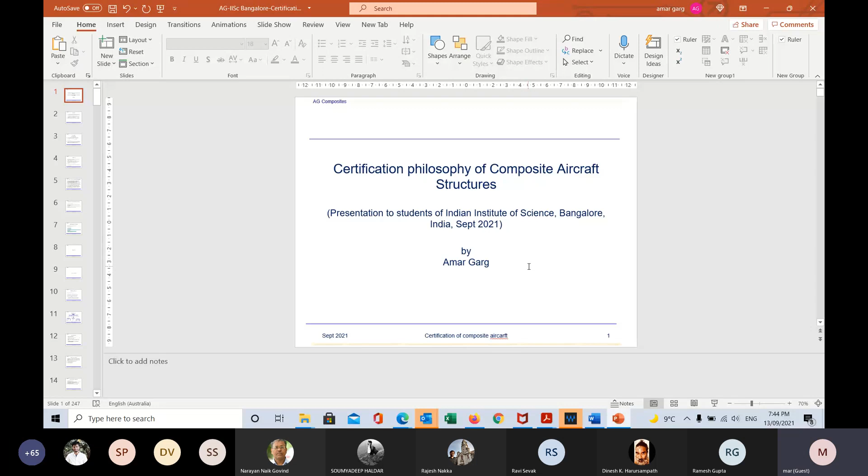As you know, the topic for this discussion is certification philosophy of composite aircraft structures. As Professor Dinesh has highlighted, my example comes from the movable trailing edge structures, but the certification philosophy, whether it's a movable trailing edge or the whole aircraft, is similar, the same. I worked on the movable trailing edge within this company when the 787 was just starting, right in the beginning, and that's the example which I chose. I had also presented a paper with my colleague at one of the SAMPE meetings, which I have taken material from.

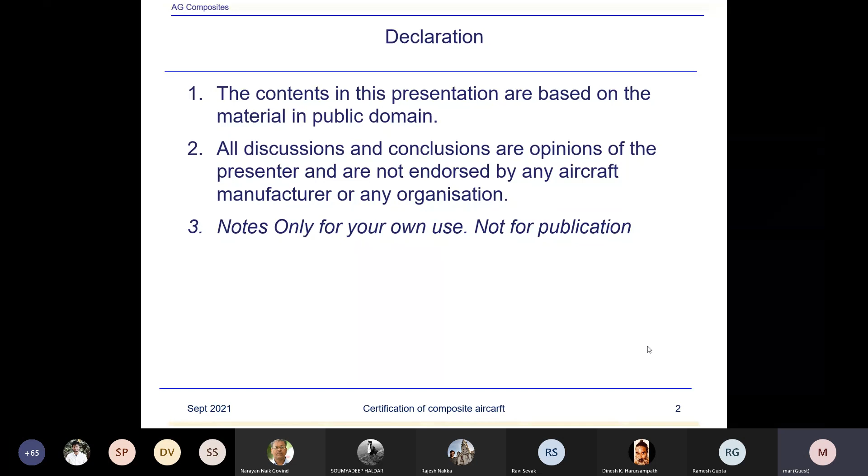I want to declare this because I've been an employee of Boeing, and we are bound by our non-disclosure agreement with Boeing, so I can't give any information that is confidential or not in public domain. All contents in this presentation are based on materials in the public domain. All discussions, conclusions, or opinions are of the presenter and not endorsed by any aircraft manufacturer or organization. It's only for your own use, not for publication.

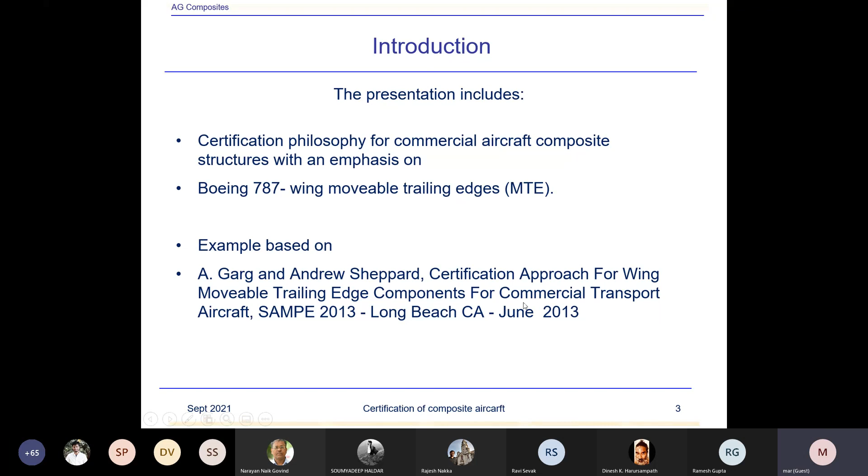Introduction: certification philosophy of commercial composite aircraft structures with an emphasis on 787 movable trailing edges. This is a paper type. I won't go through all of it, but certain references I thought are interesting to highlight.

The first is a paper from SAMPE. The second is again a paper from Boeing on the 777 empennage certification approach, which was presented at ICCM 11 by A. Fawcett and others. They are all retired from Boeing now. Fawcett was a great person in composite structures at Boeing.

The third paper, William, is also from Boeing company. By the way, you can all download this from the internet free. If you go to ICCM 11, it'll give you, it's freely available, all ICCM papers. This is also freely available. You can download the Mil Handbook 17.

I'm sure you might be familiar with Mil Handbook 17, now known as the Composite Material Handbook. But the catch is, if you want to buy the Composite Material Handbook, all the volumes cost almost $2,500, whereas Mil Handbook 17, the previous version of the Composite Material Handbook, is available free to download from the internet, and there's not much difference between it and the revised edition. So I would advise you, if you haven't got access to Mil Handbook 17, please download it. It's very important because all the information about composites—testing, design, certification, and data analysis—is contained in these volumes.

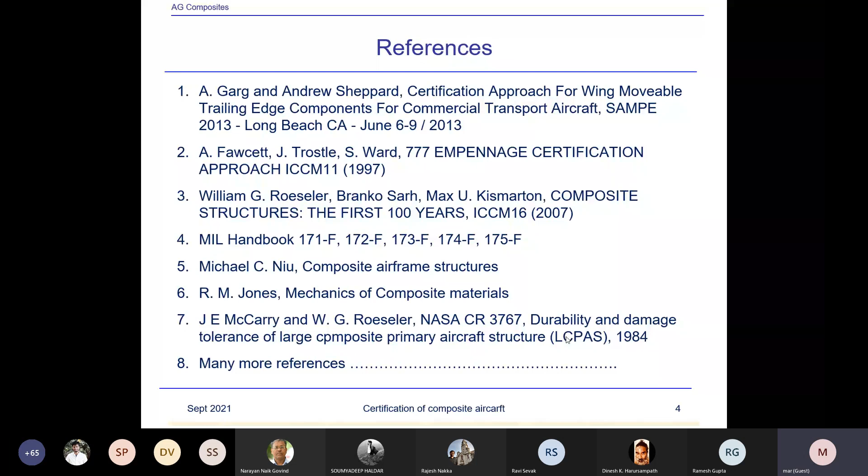Civil aircraft certification regulations are also important, and again everything can be downloaded from the internet. You may please go ahead. I muted the noise from one of the participants.

I think Dr. Garg is muted. Dr. Garg, can you unmute yourself, please? The noise was not from your end, it was from somebody else. Muted here. All right. Yeah, we can now see it.

So I was just highlighting these regulations. Part 23 is for small airplanes. Part 25 is for large commercial transport aircraft. Part 21 covers certification procedures for products and parts, and so on. Now, another important document here is Advisory Circular AC 20-107B.

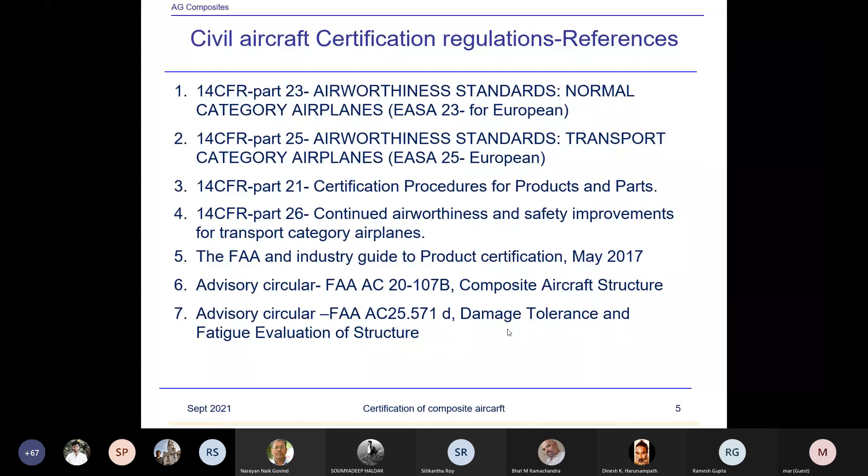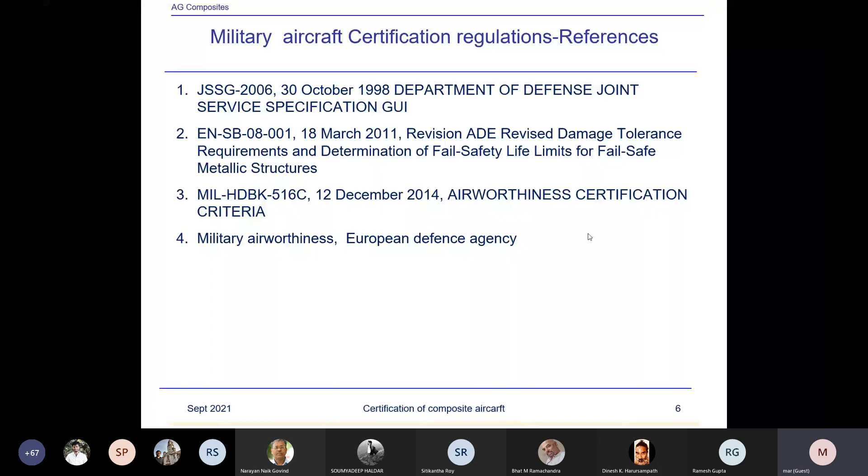This is also a very important document from the certification point of view for damage tolerance and fail-safe studies strategy - how do you meet those requirements. For military aircraft, JSSG 2006. Again, all these documents you can download. They are in public domain, freely available, useful documents. I'll put up certain links for the references, which you can use to download those documents.

Now let's consider what is certification. So certification of aircraft is a conformation to its approved design, confirmation of manufacturing processes, and is in a condition of safe operation. This is all coming from FAA documents, in fact.

So basically, the certification ensures the safety of the product. The role of a regulator is to certify a product which is safe. So they ensure the safety for the public.

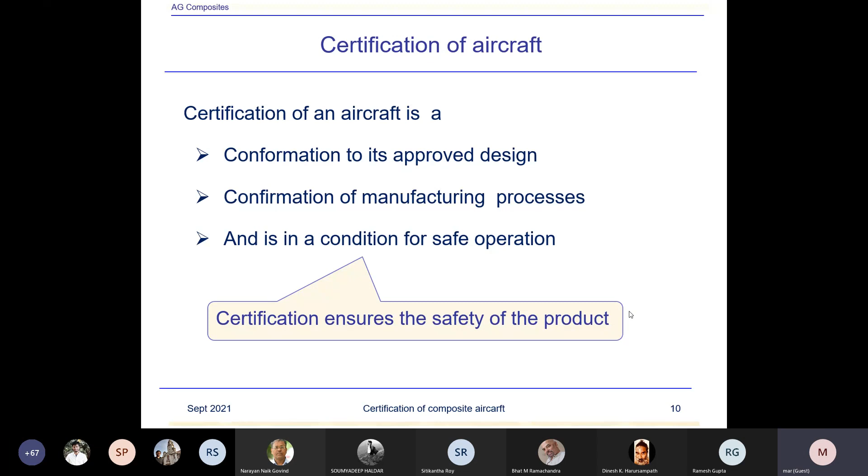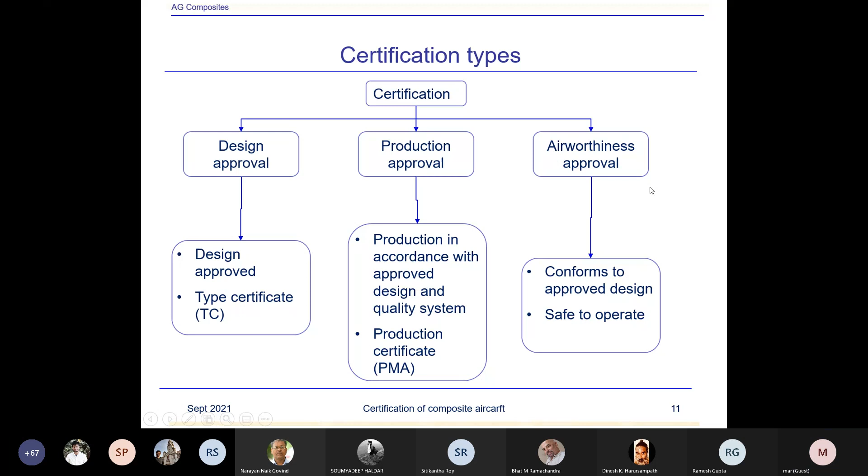Airworthiness approval conforms to approved design and is safe to operate. Now, TC, what is a TC? This is issued by the regulatory agency. TC signifies the airworthiness of approved design or type of an aircraft to be manufactured.

Now suppose Boeing had to launch the project, the 787, when it was launched. Naturally, it would submit the application for the project to FAA. And of course, in the next diagram, I will show you all the procedure rather than discussing now. And of course, after the design is approved, they will issue a type certificate.

Type certificate is the certificate for a particular design of the product or particular aircraft type. And once TC is issued, no changes can be made to the design of the aircraft, any part, unless you apply again to the regulatory agency to get an additional or supplemental type certificate.

TC once issued, design cannot be changed unless at least part of the certification process is repeated to cover the changes. TC reflects that the type design is in compliance with airworthiness requirements.

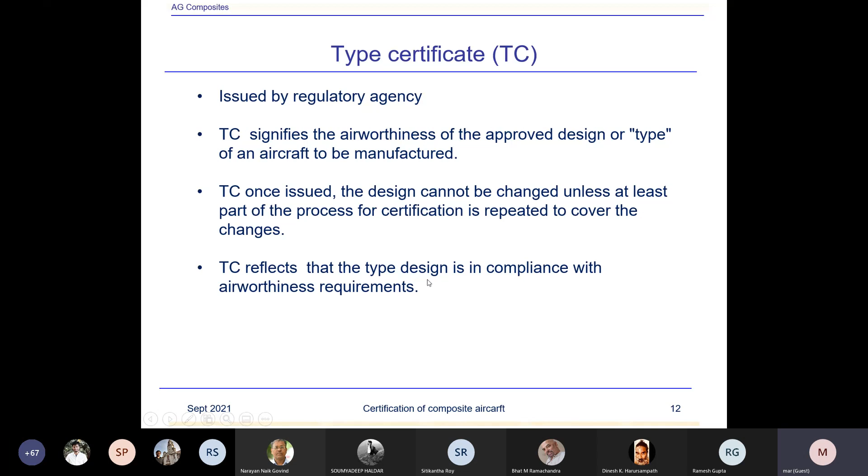Design approval means type certificate, TC, including amended and supplemental type certificate STC, or the approved design under product manufacturing approval, PMA, technical standard order authorization, letter of TSO design approval, or other approved design.

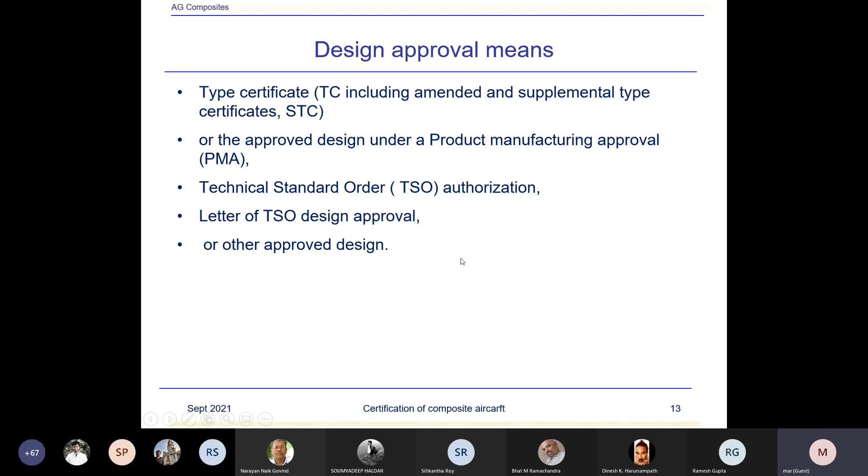Production approval means it is a document issued by FAA that allows the production of a product or article in accordance with its approved design and approved quality system, and can take the form of a production certificate, a product manufacturing approval, or technical standard authorization.

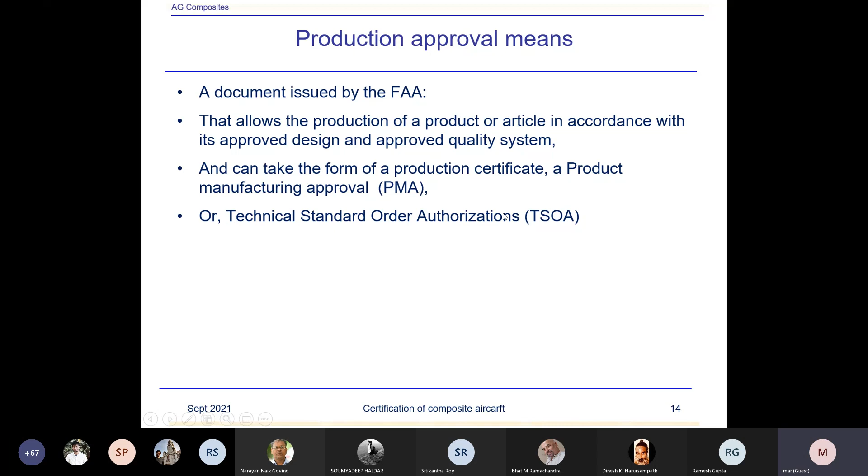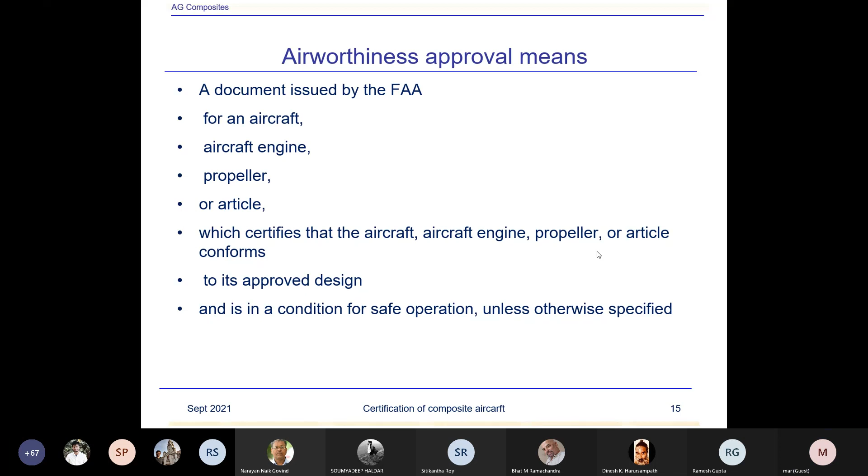Airworthiness approval is a document issued by FAA for an aircraft, engine, propeller, or article which certifies that it conforms to its approved design and is in a condition of safe operation. So that means for a product like aircraft, all three certificates are necessary before the company can sell the aircraft.

Type inspection authorization means TIA, which I'll show you next slide. TIA is used to authorize official conformity, airworthiness inspection, and flight test necessary to fulfill certain requirements for TC, STC, amended TC, and amended STC.

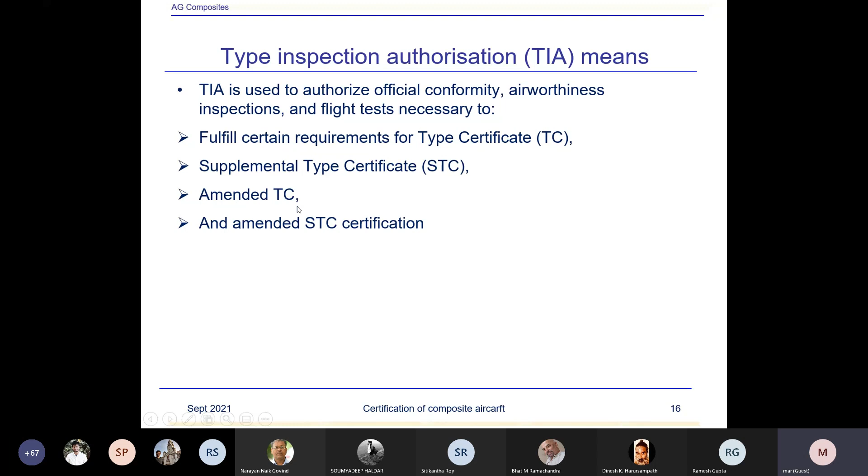Now, this is the flow chart which is important for the certification process. Manufacturer application for TC - say Boeing for 787 - applies for TC to FAA, with airplane certification, specification report, and certification plan, which is submitted. Then the regulator will assign a project number for that.

Once the project number is assigned, the manufacturer will start working on the design, fabrication methods, the material processes, and so on. Once the manufacturer has done its work, it will submit the data to the regulator, which reviews the design.

The manufacturer conducts structural, material and flight tests after that. Once the regulator is satisfied with the design, the process, and certain material and structural test data, the regulator issues the type inspection authorization, which I showed in the previous slide. That authorizes the manufacturer to perform the flight testing of the aircraft.

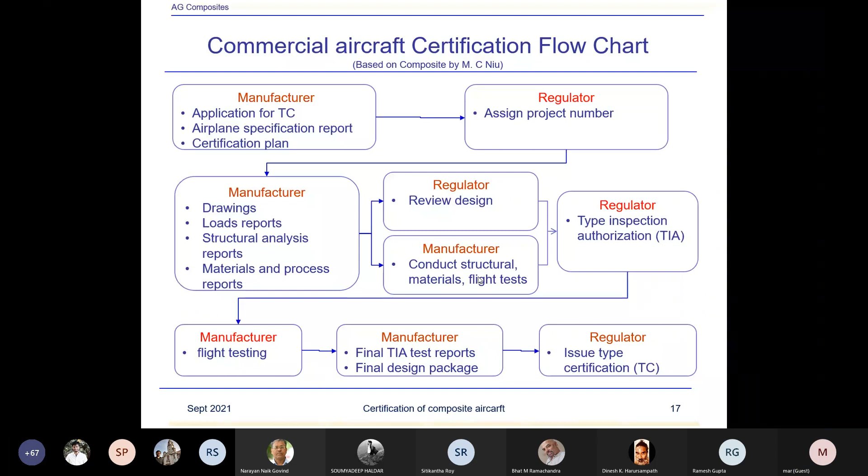Now, for military certification, I don't have a flow diagram like that because there's no single flow diagram. Certification of a military aircraft is generally a process negotiated between manufacturer and regulator. A flowchart for military aircraft would be different to civil aviation and isn't provided here because I don't have access to that and there's no single flowchart.

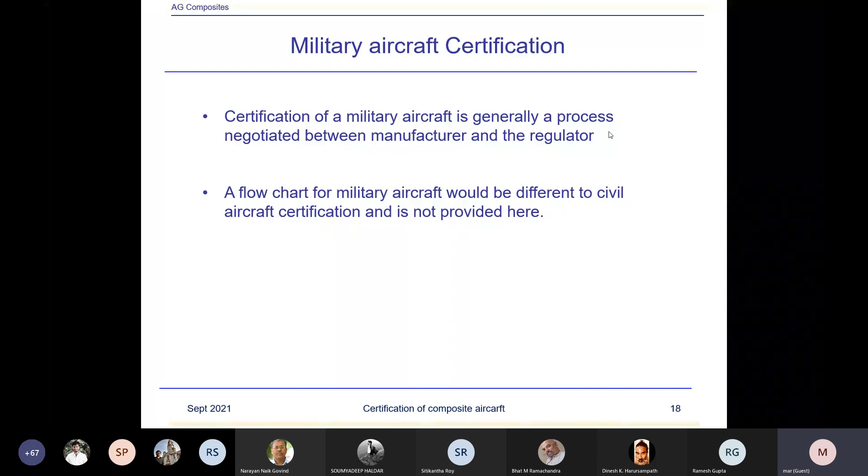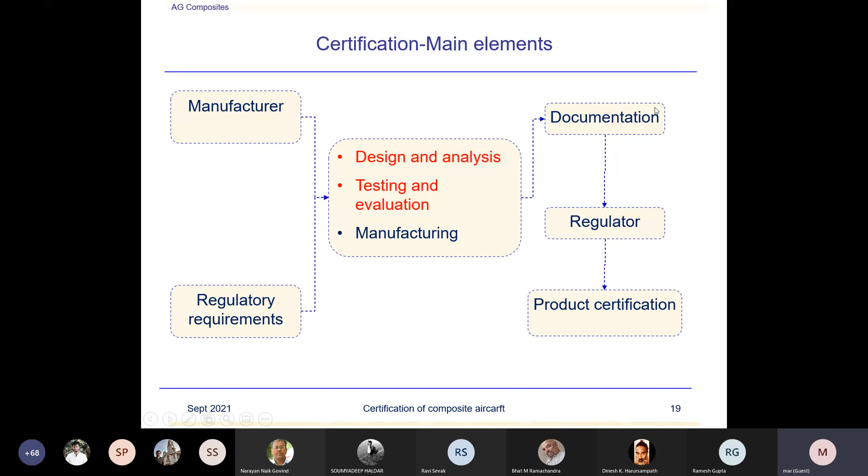Okay, main elements of the certification: you have manufacturer and regulator requirements, design analysis, testing and evaluation, and manufacturing. These are the three basic elements for certification. And then, of course, the documentation which is submitted to the regulator, and the product certificate. That's what we discussed in the previous slide.

Challenges for certification for composite compared to metals. The issue is, what is the difference between certification of a composite structure and metallic structures? We know there are certain differences between composite materials - they are heterogeneous, they are anisotropic, which puts certain difficulties in the analysis of the structures because of anisotropy. While metals are isotropic, the analysis becomes easier compared to anisotropic materials.

Environmental sensitivity - resins, we know, are highly environmentally sensitive. Suppose we're talking of the current composite materials used for most aircraft structures, which are cured at 350 degrees Fahrenheit or 180 degrees centigrade, the epoxies. They are sensitive to temperature and moisture. If we consider compression strength compared to room temperature at about 70 degrees centigrade, which is normally the operational temperature for which we design the aircraft, the degradation factor we normally get is almost 20% reduction in compressive strength. So that's environmentally sensitive with both moisture and temperature.

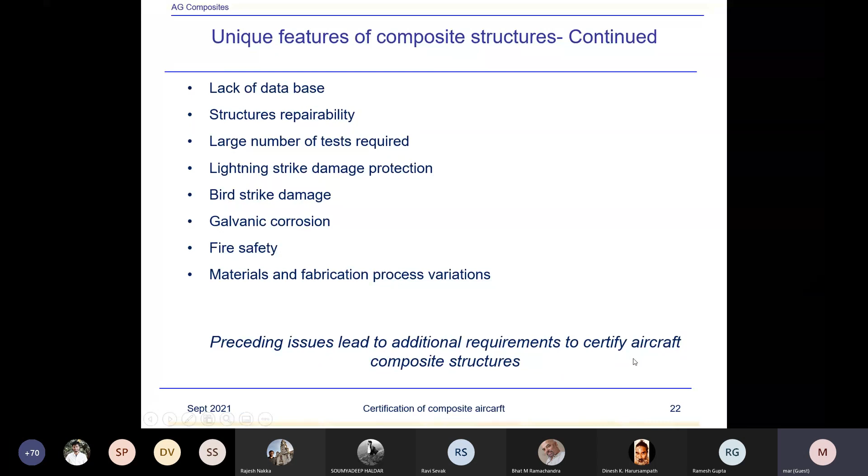Usage of composites in aircraft - one of the key drivers for the use of composites. Now, one would ask, I have shown many of the difficulties of using composite structures compared to metal. Then why do we use composites at all?

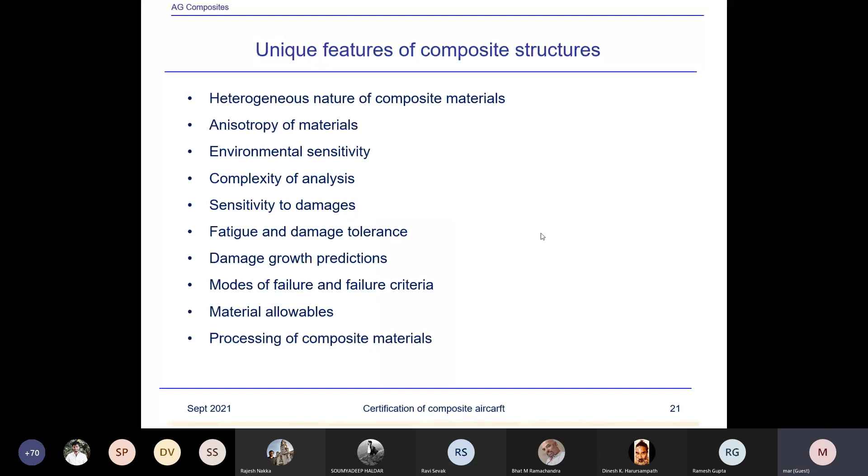The key is that composites do have advantages, and that is why today's aircraft like the 787 or Airbus 350 have almost 50% composites in the structure, because it leads to fuel consumption reduction. So key drivers of composite usage are weight reduction and fuel efficiency for aircraft, which leads to cost saving for the airlines, and it is also environmentally friendly. If you can reduce fuel consumption, naturally you create less greenhouse gases.

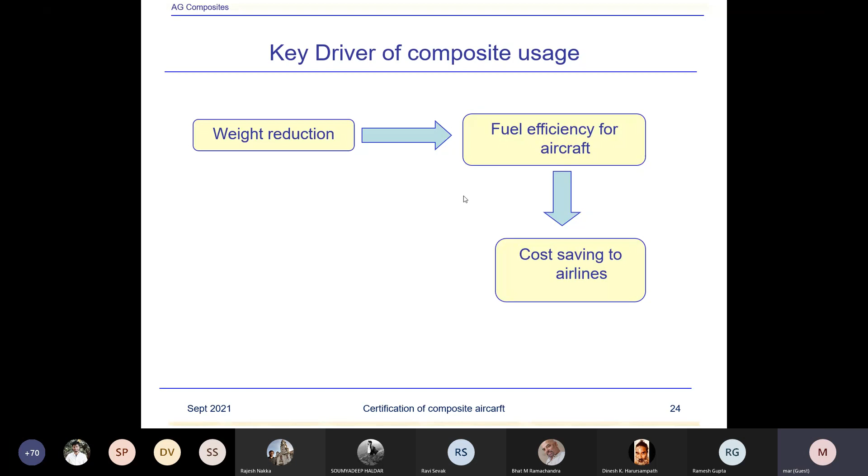Motivation of composite usage in aerospace: compared to aluminum, there is certain improvement in parameters - high specific strength and stiffness. Composites offer very high stiffness and strength with low density. Fatigue behavior is better than metal for composites. There are also minimized corrosion issues - aluminum corrodes while carbon doesn't, so naturally it's an advantage.

Reduced number of parts - you can integrate many of the parts and details possible, which may save cost, and also reduced number of fasteners. You can do bonding of the structures, which reduces the fasteners, and fasteners are a big cost to the aircraft industry.

Due to this, the result is lower weight, lower fuel consumption, lower maintenance, lower cost, increased cabin pressure, and increased passenger comfort.

Dr. Garg, can I ask a question here? Yes, sure. This is Amar Bhatt, I am from IISc, a colleague of Dr. Dinesh. In this slide, the last point is not very clear to me - how does using composites help increase cabin pressure?

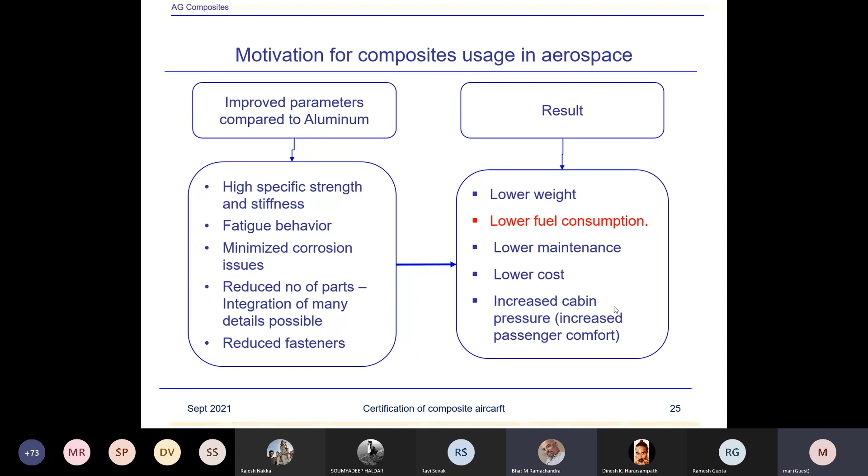Okay, now this is just an example to show the impact of the composite materials, and I have taken this information from one of the NASA reports, which again, these are Boeing people who had written quite some time back. So this is a Boeing analysis in public domain, on wing box and fuselage, when they were studying in 1980s, the composite structures, advantages compared to the aluminum.

NASA had funded lots of projects for Boeing, Lockheed, and you can go through the NASA technical reports server and download these reports, they're very interesting. Lots of commercial aircraft studies were done by these big companies through NASA, so that's why they are all in public domain.

I find NASA server to be very useful. Every day I search lots of reports from NASA and I get the information.

Very useful. Okay, now, so in this slide, what I have shown, just taking for example, that the wing box panels, composite wing box and fuselage savings compared to aluminum when they had done this study. This was done for a large commercial transport. Of course, this is in 1980s, and today we have much better materials compared to that time, and savings would be even more.

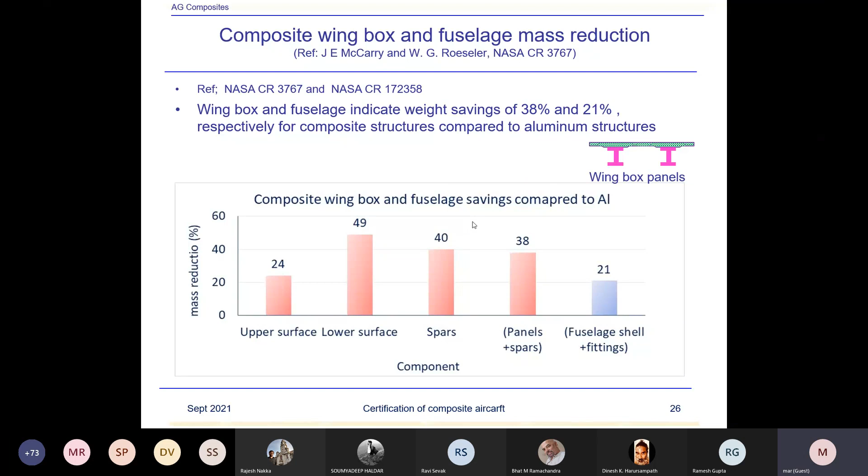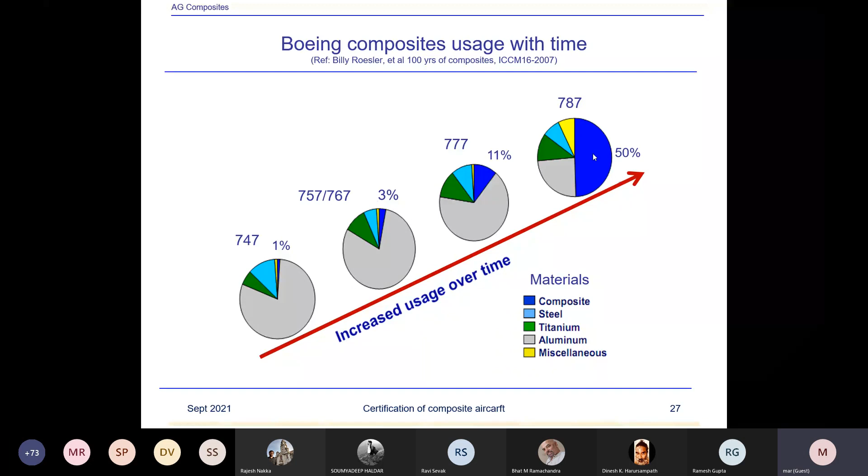And suddenly 787, certified in 2011, 50% composites. So there's a significant jump. Here you have the fuselage, wing, most of the structure is composites. Next slide will show that.

So this is the 787 aircraft, you can see, and almost all of the structure is carbon composite. And the equivalent aircraft from Airbus, the 350, is also similar to this, which is, by the way, 53% composite.

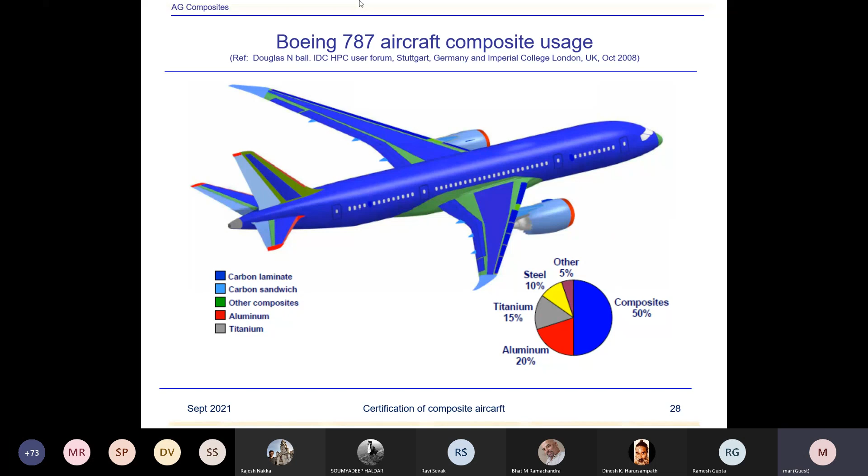This is a chart which I've taken from one of the publications, presentations by Boeing or in ICCM. What it is just showing you, say these are the aircraft like 747, oh sorry, this is 777, sorry, quads, 747, oh I'm sorry, 747 quads, 747, and these are like 777 aircraft, twins. But you see 787 lies over here in terms of fuel consumption per trip and fuel consumption per seat,

which is considered to be 20% fuel saving to the airline, which is a big saving in terms of cost to the airlines, and so, of course, then to passengers. Now, this has been possible by using the composites. It won't have been possible using a metal.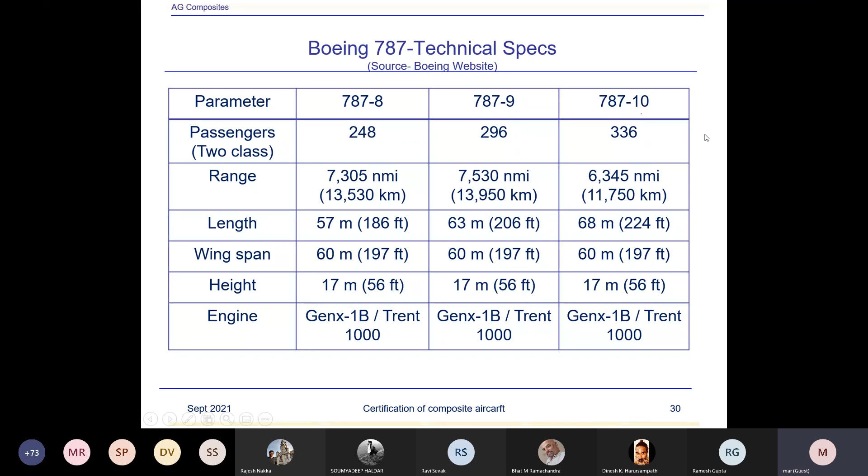Okay, now let's discuss the 787. Anybody has any questions so far? No. Okay, you can always ask me anytime.

Okay, 787 movable trailing edges. What are these movable trailing edges? Basically, they're the flaps, flaperon, and aileron, or trailing edge surfaces; they call them movable trailing edges. So you have inboard flap, you have flaperon between outboard flap and inboard flap, and then aileron. We all know the function of these details, and these are spoilers and the rigid hinge panel.

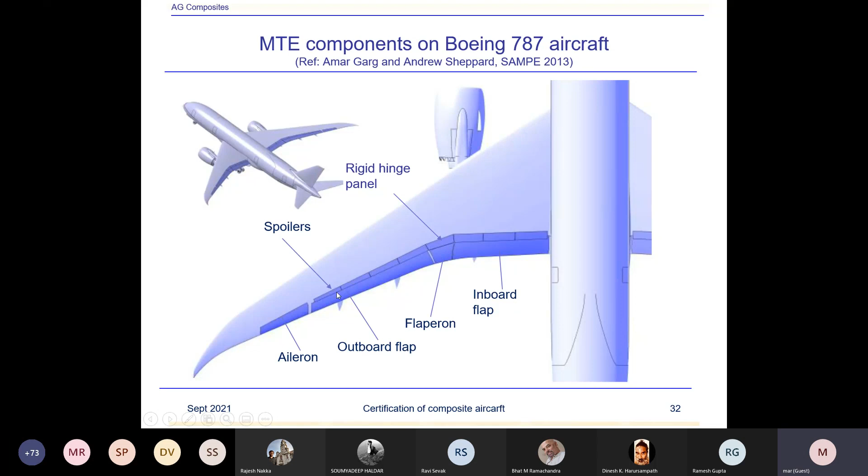Let me show you this one. So MTE structures, PSEs. What is PSE? Principal structural element. I'll show the next slide with the definition to make it very clear. So it's like a primary or secondary structure. This is secondary structure and this is primary structure. But rather than calling them secondary and primary, we call them principal structural elements and non-principal structural elements. These are principal structural elements: inboard flap, outboard flap, and aileron, which are fastened rib, skin, spar structures. They're like black aluminum basically when we designed them.

To manufacture these composite parts, the resin infusion process is used rather than the autoclave process. Non-PSEs are flaperon and spoilers. Flaperon is a stiffened structure, while spoilers are bonded sandwich structures, and they are autoclave cured, not resin infused parts.

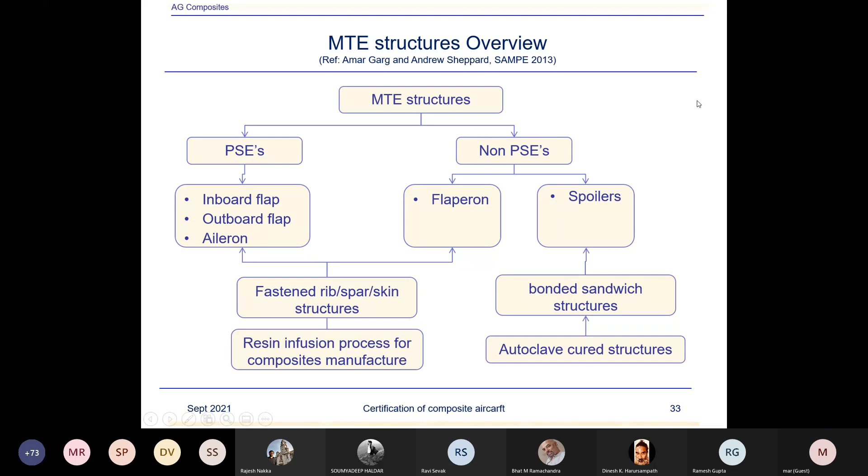Any question on this? No. Okay, so what is principal structural element, which is like a primary structure? Definition per AC 25.571D: an element that contributes significantly to the carrying of flight, ground, or pressurization loads, and whose integrity is essential in maintaining the overall integrity of the airplane structure. Basically, suppose a PSE fails, that means safety of the aircraft is jeopardized. That is why you do not want a PSE to fail.

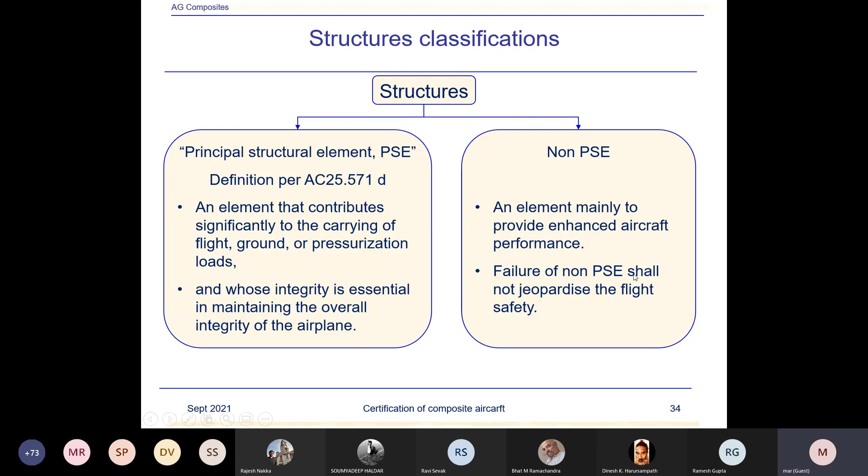Non-PSE are secondary structures essentially, an element mainly to provide enhanced aircraft performance. However, the failure of a non-PSE shall not jeopardize flight safety, whereas failure of a PSE will jeopardize flight safety. Failure of a non-PSE is about enhancing performance of the aircraft. That's the difference between these two.

Let's consider these individual components to highlight a bit more detail. I couldn't show the internal details here, but basically it has ribs, spars, like a conventional aluminum structure, and fastened. Inboard flap is a single slotted, single segment type high lift device. The structure consists of multiple spars and ribs fastened to the skin. Skin, rib, leading edge and spars are solid laminate.

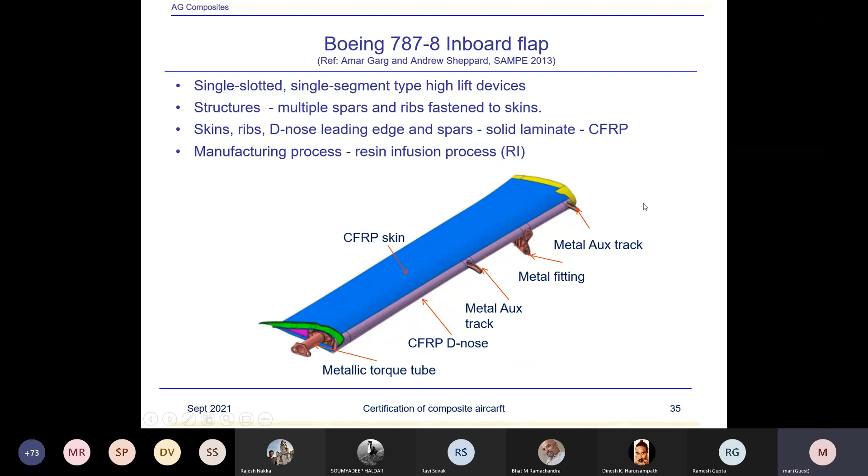Carbon fiber reinforced plastics, manufacturing process is resin infusion, and these are metal fittings, torque tube. Similarly, the outboard flap has exactly the same type of structure as the inboard flap: skin, composite, metal fitting, carbon D-nose, metal fitting, aux track.

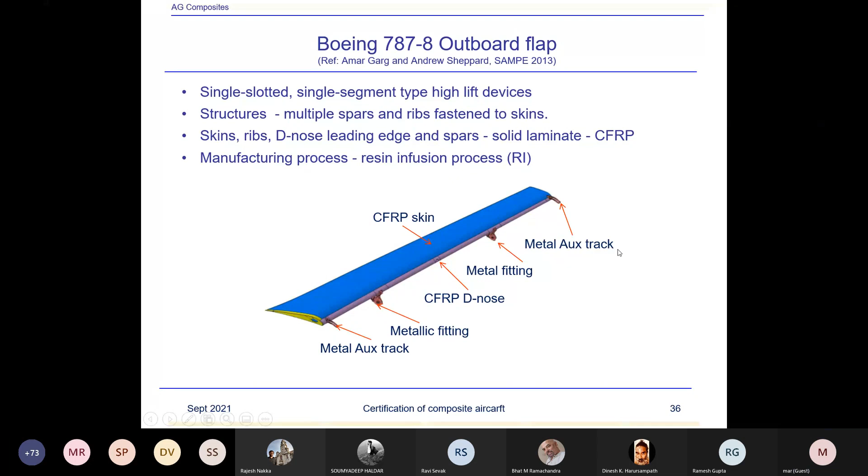Aileron is similar, it has multiple hinges. There's no D-nose here, and these are fittings and actuators both. Aileron hinge control surface is used for low speed roll control, lift control during takeoff, and drag reduction at high speeds.

Front and rear spars and ribs are fastened to the skins - skin, spars, and ribs are all solid laminates, similar to the flaps, with manufacturing process similar to the flaps, resin infusion process. I'll show those of you who are not familiar with the resin infusion process my discussion in some of the slides in this presentation.

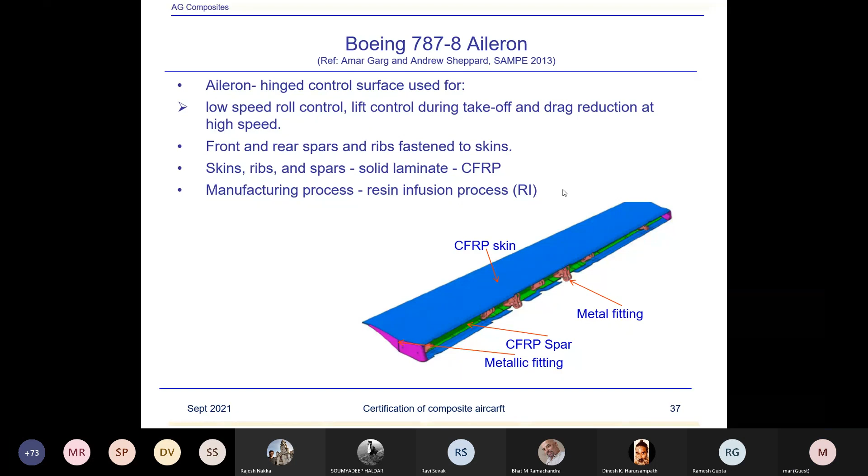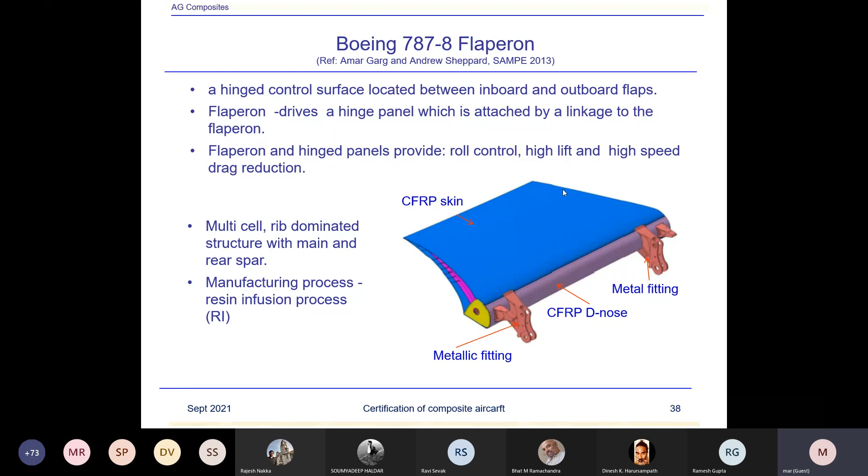Flaperon, similar to the flaps in terms of structure, is a hinge control surface between inboard and outboard flaps. Flaperon drives a hinge panel which is attached by linkage to the flaperon, and flaperon hinge panels provide roll control, high lift, and high speed drag reduction. Structure is similar, a multi-cell rib dominated structure with main and rear spars, manufacturing process resin infusion.

Spoilers, total 7 spoilers on either side. Spoilers function as speed brakes and for roll control, and also droop down to control the gap between the spoilers and the flap for high lift performance. So spoilers are full depth honeycomb core sandwiched between front CFRP spar and CFRP skin. So you have this carbon spar, carbon skins, and it's a honeycomb sandwich structure.

Now, the process to manufacture this is autoclave. One would ask, why not resin infusion? Of course, you can't use resin infusion process for sandwich structure. The reason being, if you try to use resin infusion for a sandwich structure, the core cells will get filled with resin. And so that's why you have to use the autoclave process.

Now I want to highlight sandwich structure. When I was working on the Airbus landing gear doors, I was in charge of a project developing the resin transfer molding process for the Airbus landing gear doors, because we were manufacturing in the early 90s. The Airbus landing gear doors for the 330 and 340 were being made by a Melbourne company, Boeing. At that time the landing gear structures were all sandwich, and we had to work on developing the structures using the resin transfer molding process.

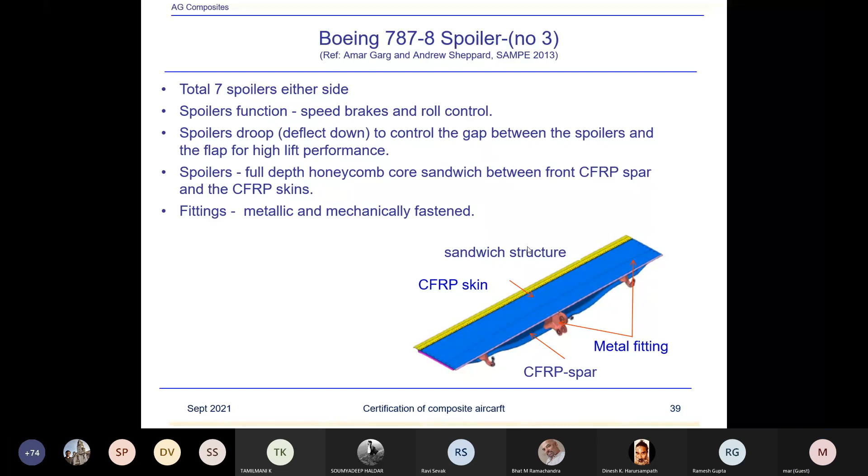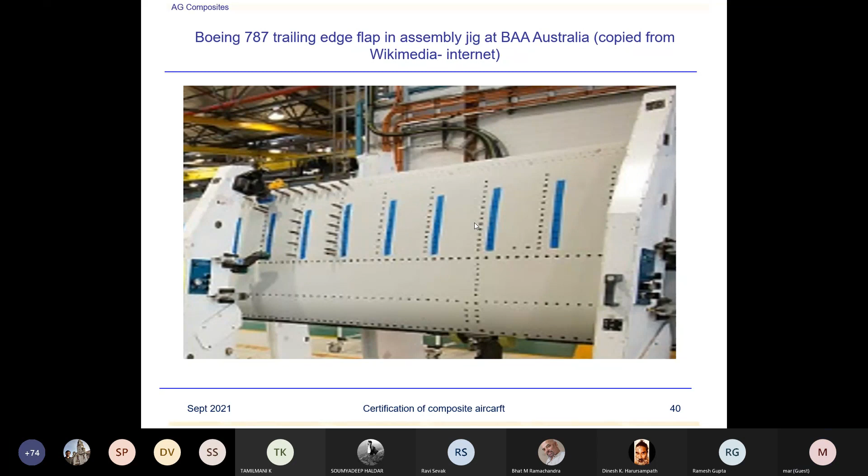So this is just a typical structure from outside. What you can see is it's like black aluminum, conventional aluminum structure, with rib, spars, stiffeners, all fastened together. Just a typical stiffened structure, I'll show you here, nothing great about it. Schematically, you have spars, D-nose connected, and the trailing edge.

Approach to certification. Okay, excuse me sir, sure, yes sir, I would like to ask about this aileron and these principal structural elements. You said that resin infusion is used, so in resin infusion, was the process like resin transfer molding only, or is it other variants?

Well, a resin infusion process is similar to what you are using, basically they are calling it a variety. Same process, different names. Some people call it resin infusion, Boeing calls it Capri. That was full pressure, but it's VARTM. So not with high pressure of resin, but by inducing vacuum. That's right, resin infusion process is that, because when I was telling the story about the landing gear door development using resin transfer molding, we were using a closed mold system at that time rather than vacuum. So that was resin transfer molding with a closed mold system, solid mold. So this process is nothing but VARTM, vacuum assisted resin transfer molding. Otherwise, a closed mold system is very expensive, and then it becomes not feasible. Yes sir, right, right, thank you, okay.

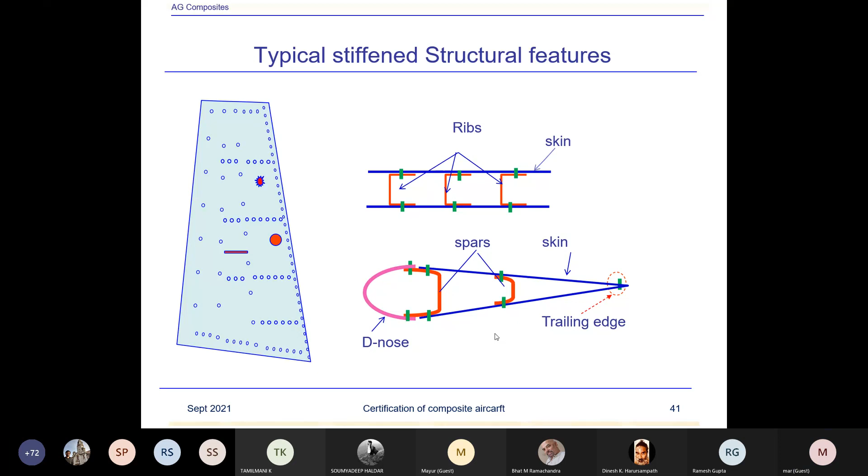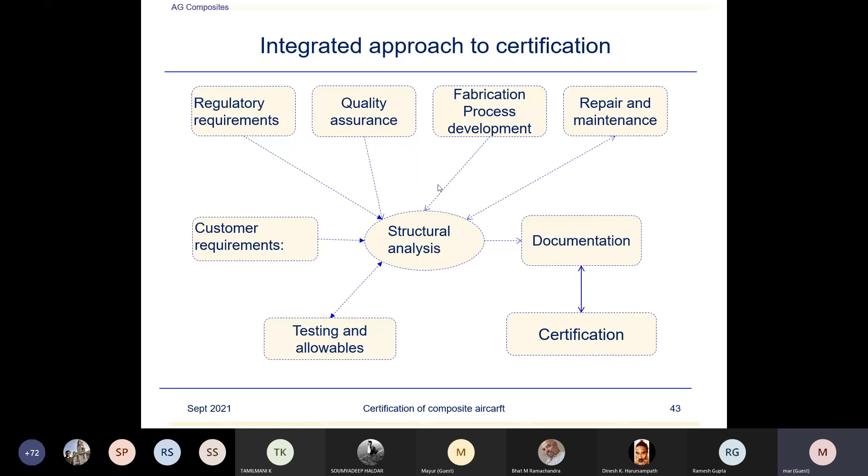Okay, now approach to certification. Certification approach is an integrated approach. I've not highlighted all the details over here, and there are many other considerations which go into the flow diagrams. I just put a few key elements for this. So you have the customer requirements, and you try to do the structural analysis, like suppose flaps you are designing, and using the customer requirements and the regulatory requirements, you would start working on design details. In order to do the design, of course, you would require testing and allowables, quality assurance, interaction, fabrication, process development, interaction with repair, maintenance, documentations. These are some of the elements important for structural analysis, but nevertheless it's not the end of it, there are plenty more. It's a very simplistic diagram I put. Customer requirements like performance, operational loads, weight, geometry, cost. These are performance requirements which you need to consider in order to develop your design.

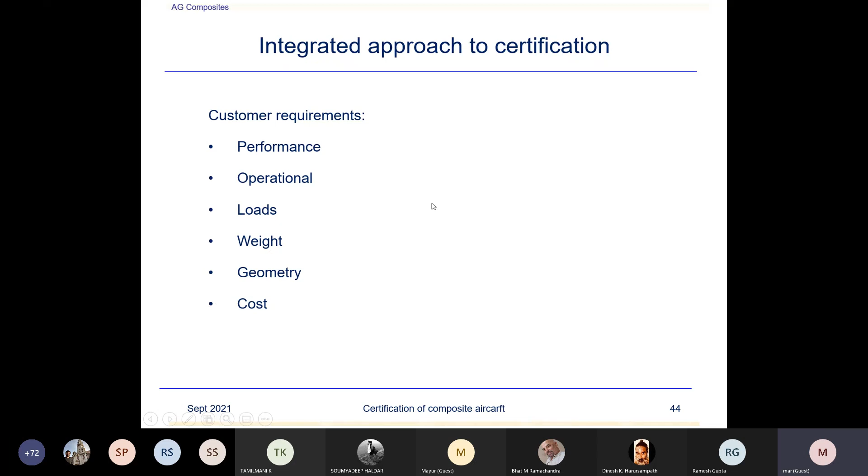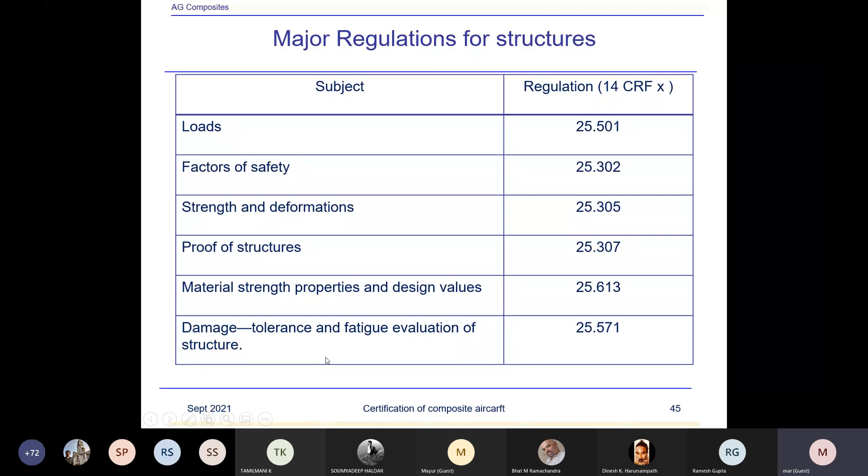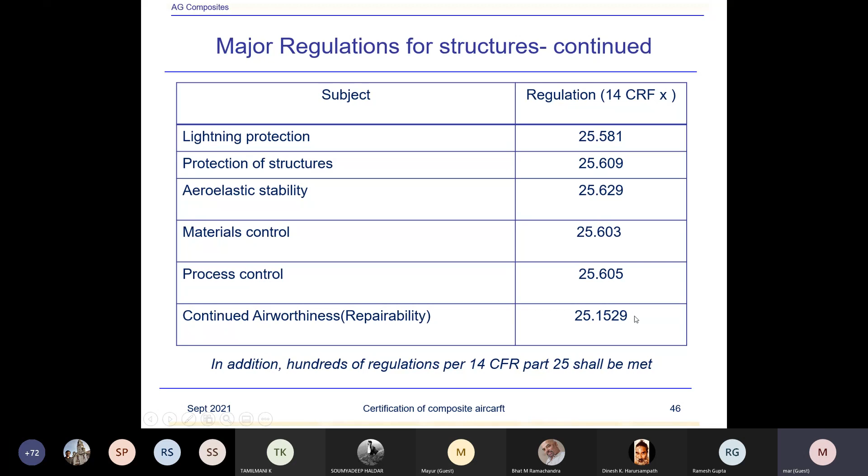I thought let me just put a table over here to highlight some of the important regulations for structures design, which are key to structural analysis and design. Like loads, you have 25.501, factor of safety 25.302, strength and deformation 305, 307 proof of structures, material properties 613, damage tolerance - this is very important, part 25.571 - and my main emphasis in this lecture would be 25.571, and you will hear me naming this quite repeatedly because it's one of the most important regulations to which we have to design aircraft structures. Lightning protection 25.581, protection of structure 609, stability aeroelasticity 629, materials control 603, process control 605, and continued airworthiness repairability 1529. In addition, hundreds of regulations per 14 CFR Part 25 shall be met in order to certify the product.

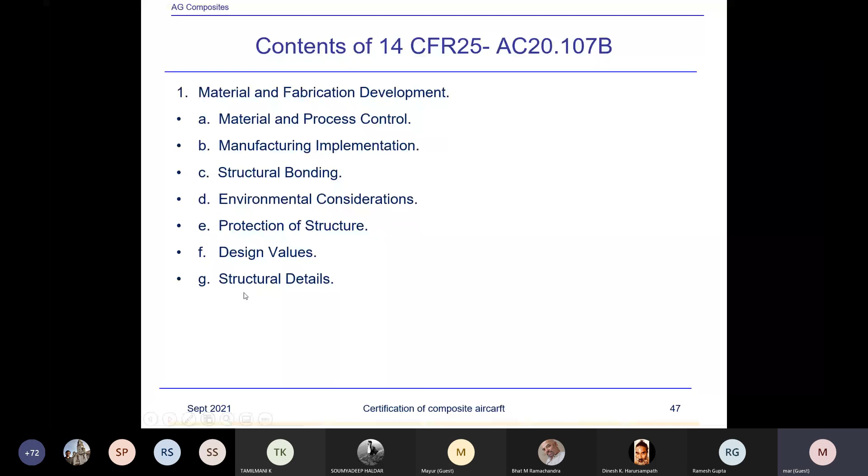I just put some details using 14 CFR 25, AC 20-107B, which is the guidance for aircraft composite structures, and what it contains. It contains materials and fabrication development, material process control, manufacturing implementation, structural bonding, environmental considerations, protection of structure, design values, structural details, proof of structure. How do you do the structural proof?

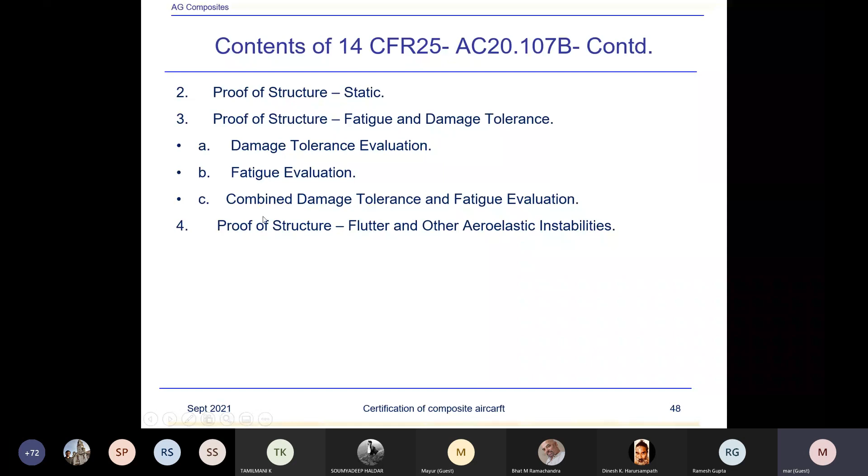Static and fatigue damage tolerance - it provides the methods: damage tolerance evaluation, fatigue evaluation, combined damage tolerance and fatigue evaluation, proof of structure, flutter and other aeroelastic instabilities, continued airworthiness, design for maintenance, maintenance practices, damage detection, inspection, repair, documentation, reporting, substantiation of repairs. There are also additional considerations like crashworthiness, fire protection, lightning protection, and so on.

I want to highlight, as I advised you, that you should download this document from the FAA website and just glance through it - you'll get a good feel for what it contains.

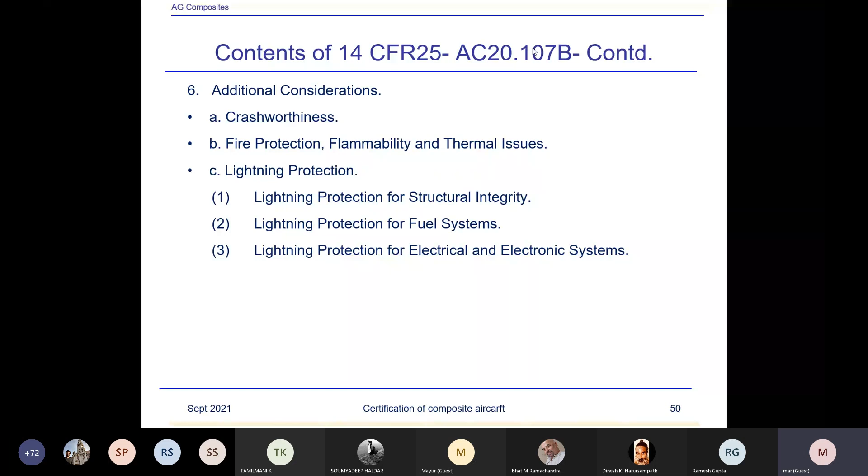Now, design certification approaches - certification of aircraft structure approaches. There are three types of approaches one could follow. One is certification by test, which is a point design approach, where it may initially be low cost, but in the long run this costs much more. So generally the industry will not use this approach, unless the industry has to produce only one part, one component, one product, and they are not looking into any variation of that later on. But generally, the industry will use certification by structural analysis verified by test.

Certification by analysis alone is also not recommended or easily acceptable. It may be accepted only if enough confidence in the analysis exists - you've developed the methods of analysis, and once FAA has approved all those methods, it might be easier to go through certification by analysis. But beyond this, suppose you've got all the methods and processes based on your previous versions of the aircraft - like Boeing, they have a lot of data available from previous metallic aircraft, and they could always piggyback because they've got design handbooks and can design the aircraft without performing significant amounts of tests.

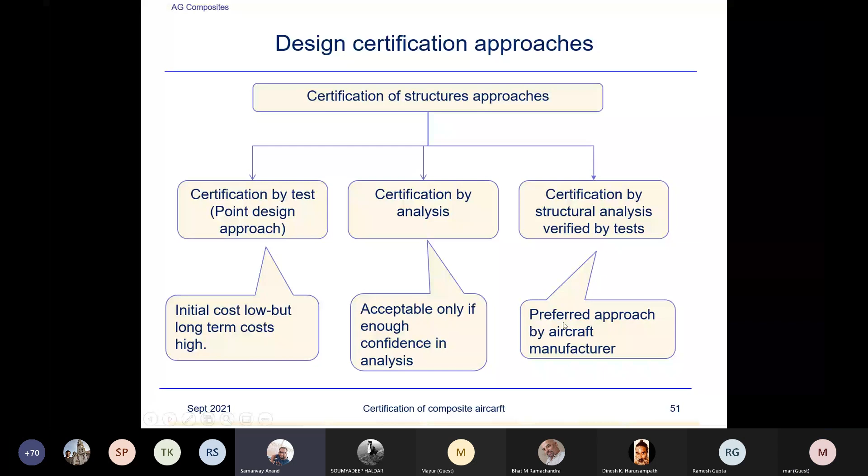So that's the reason. Okay, certification by testing the complete full structure. So allowables in this case is limited allowables. Initial cost may be lower. Any change in design will require testing the component again. And this is the problem with this approach.

Say the 787 aircraft, when it was designed, later on companies will always try to improve the design, change this part, another part, but it doesn't mean the company has to retest all of the aircraft.

Suppose they are changing one outboard flap which is designed as stiffened structure, and now the company decides they want to go for bonding technology, and they've got enough confidence in the bonding technology. They don't have to then test the whole aircraft.

What they can demonstrate, because they've got enough data for those materials, they may have to do only a limited amount of testing. So that's the advantage of that in the long run.

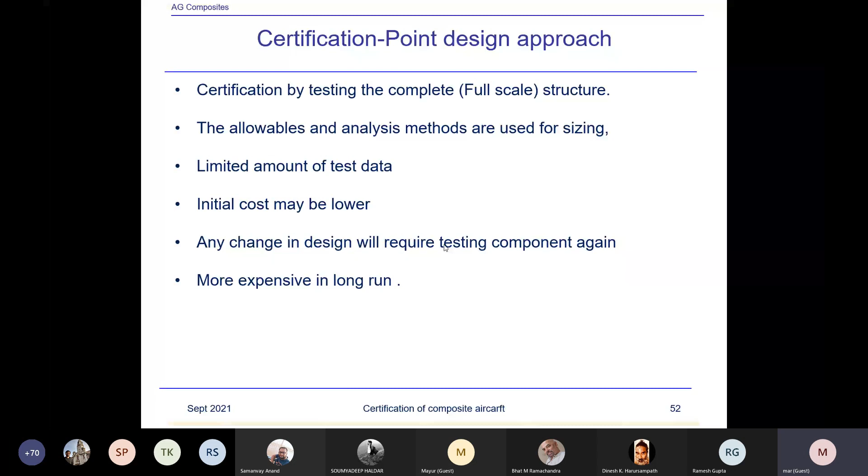Okay, certification by analysis verified by test. This is the preferred approach, as I said. So here you have an analysis certification of structures. Testing, you do coupon, element, subcomponent, component, using a building block approach to testing.

And this is what we'll discuss: what is the building block approach? Using this, you develop allowables and analysis methods verification. Essentially, what you are doing in this method, you are still certifying by the analysis, but all that analysis has been substantiated by your test data.

Same during the 787 program, and we'll discuss all the details when we are designing this component, flaps, all the movable trailing edges. The process was new at that time, the materials were new, and so we had to develop the analysis tools and verify them by testing.

Okay, now, so I said about the full scale testing requirement. This is what I've just written, the para from 25.571(b), which says damage tolerance evaluation. This demonstration must be by full scale fatigue test evidence. Of course, there are many paragraphs over here. So this is a must now.

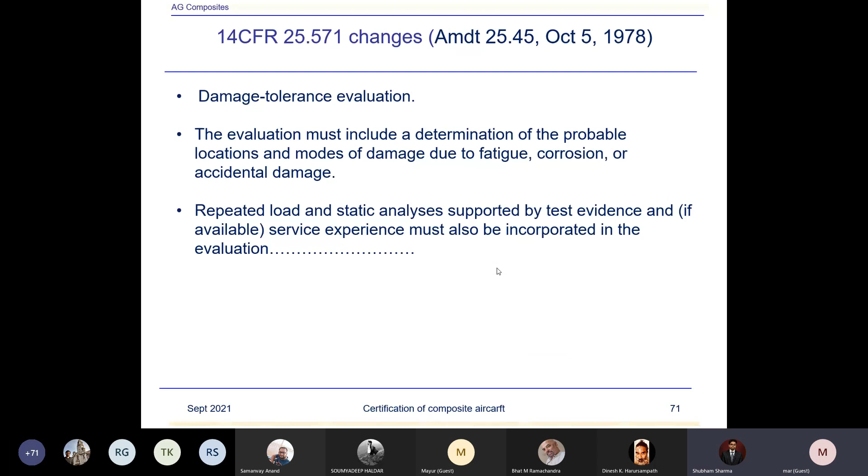And this requirement came after, in fact, I've got it, let me just show when this came. After the Aloha aircraft failure, and we'll discuss this issuance of Amendment 96 for WFD, widespread fatigue damage. And this is what happened.

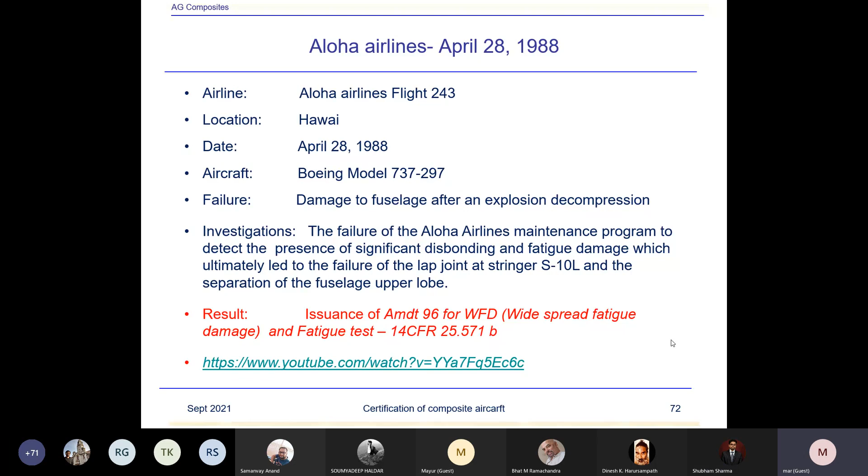So it's mandatory now for the whole aircraft to be tested before certification, full certification.

One more quick question. Sure. When you say each aircraft is subjected to full scale fatigue, do we mean to say one from a batch of 787, one sample full aircraft, or each manufactured one? No, not each manufactured. How can we test the whole fleet? That's what I was wondering.

No, it's one. This clause clearly says what happens. All this testing is done only for the first, initial production aircraft. Only one aircraft, say like the 787-8, the first aircraft, or maybe a series of 3 or 4 aircraft they will make.

One will be the flight test, or two will be the flight test. One will be this fatigue test. Another will be static test, like that.

Yes, okay. Once that is approved, then no, because what you are doing, you are having the same material, same production process, everything to be the same. You don't have to test everything. You can't test everything, every aircraft, no way.

And so in case there is a small change, then perhaps we have to do that. Well, now the thing is, then what happens? Suppose you're changing only a small part of the aircraft, then you will try to demonstrate that locally by subcomponent testing. You don't have to change again and test the whole of the aircraft.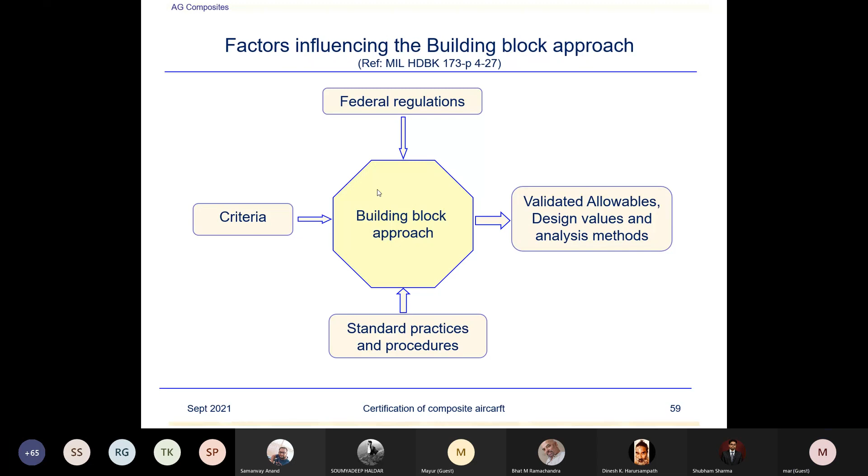Do we want to stop over here, just 5 minutes remaining before we close off? Any questions or comments you'd like to offer to make improvements for the next lecture?

Can I ask one of the questions? When we talk about certification, we saw your presentations that there is certification of process, certification of manufacturing, and all that. How about the raw material used for these fabrication processes? For example, carbon fiber itself or the epoxy itself? Are there mandatory certifications, or do we accept the manufacturer's certificate?

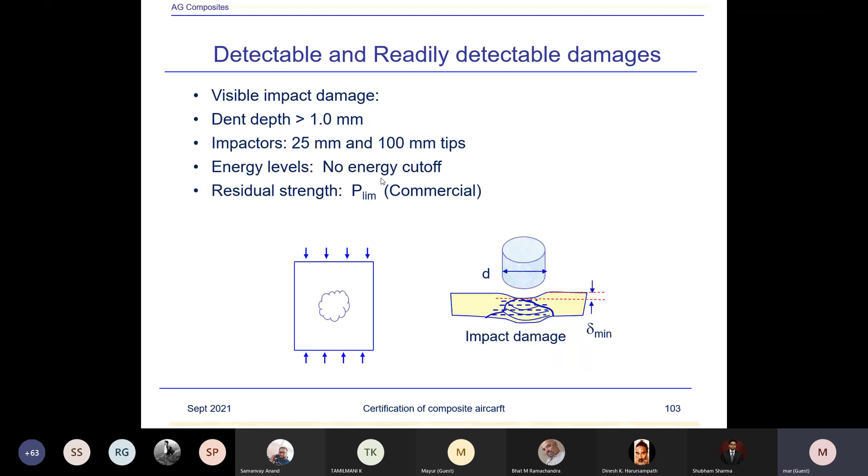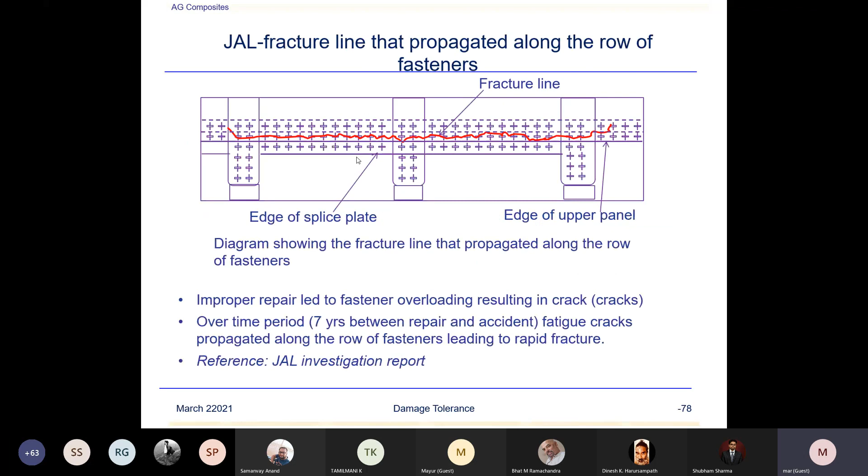What happens, we'll study that. I've got it here. If you're going there later, fine. I'll be discussing how we certify that. Yes, we have to do all testing and certify the material before we accept it. That's part of the building block approach.

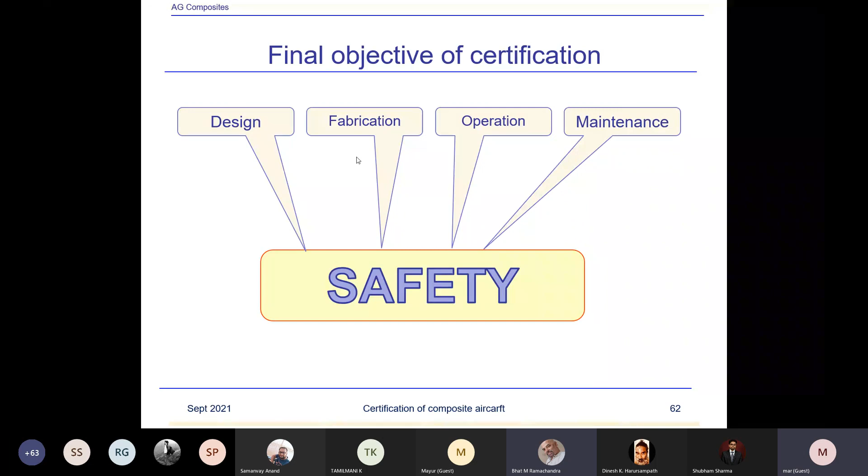Any other questions? Anybody? A general question - I don't know whether you would like to answer that or not. I remember, even in the newspaper, a fleet of 787s were grounded, and I remember it was a power plant problem or a battery problem or something like that.

Yeah, you might have read that in the press media release. Yes, there were some issues at that time, of course, but they were all sorted out. How did it creep in? Is it because some of the tests were not performed on this?

No, I'm not aware of that because I was not involved with that battery. There might have been some battery issues. But usually what happens when a product is put into service, there will always be some minor issues coming up. It's difficult to envisage everything. And moreover, Boeing has thousands of subcontractors.

So yes, all those things - when some issues come up, they sort it out. And I can tell you, in the aircraft industry, safety is a primary goal, and it follows one of the maximum safety standards really, at every step. Okay, thanks.

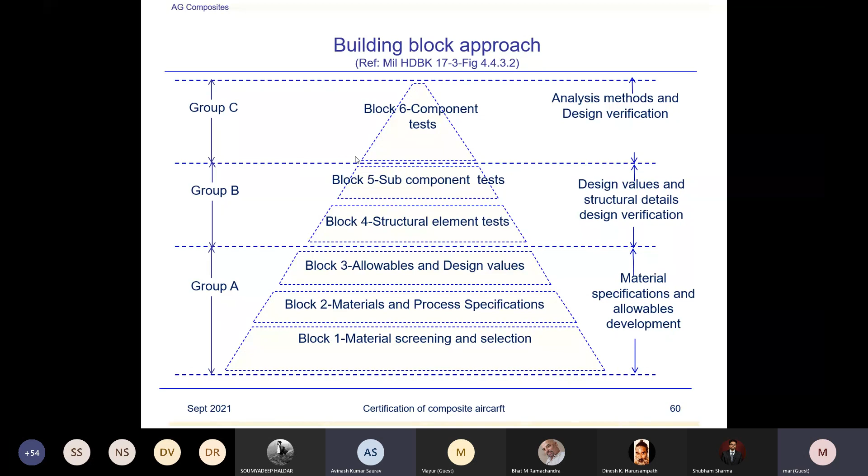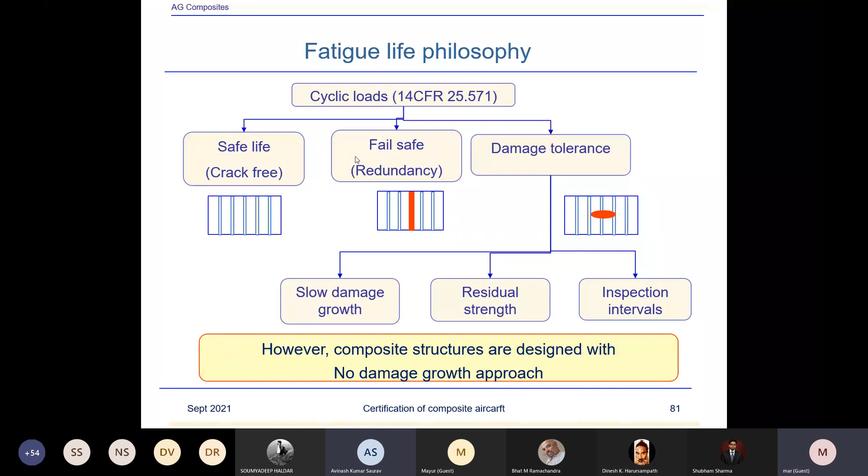So do they have their own material testing system and everything, or does some other agency do this? I think you have to wait for my discussion. If you see my presentation - do you all have the presentation? Yes, I have seen the presentation. Okay, now I will be discussing that. It's a good issue.

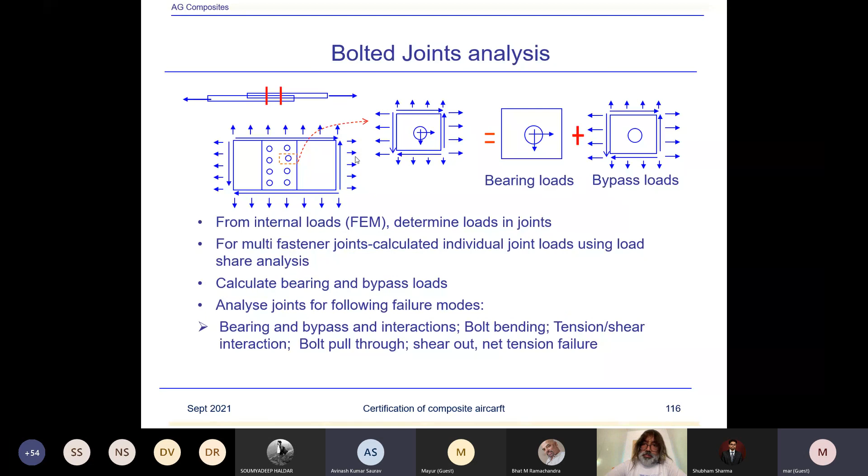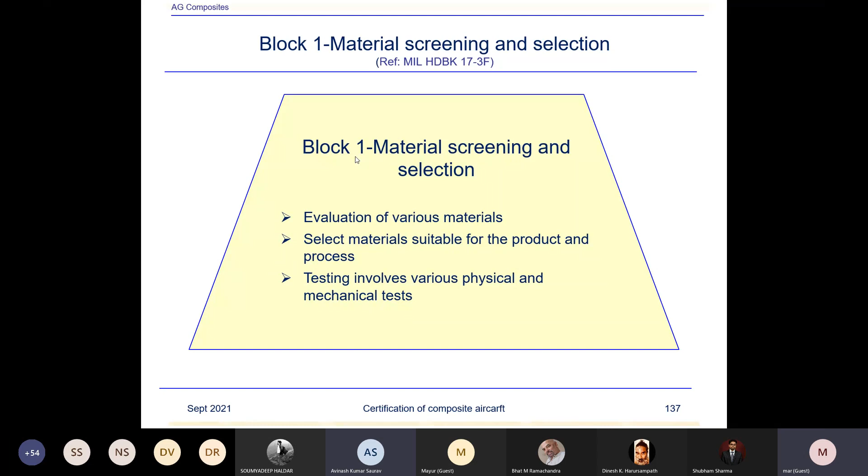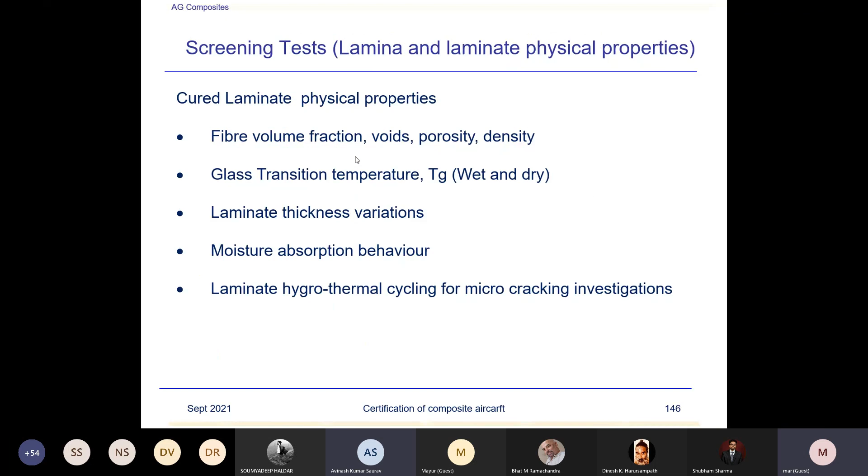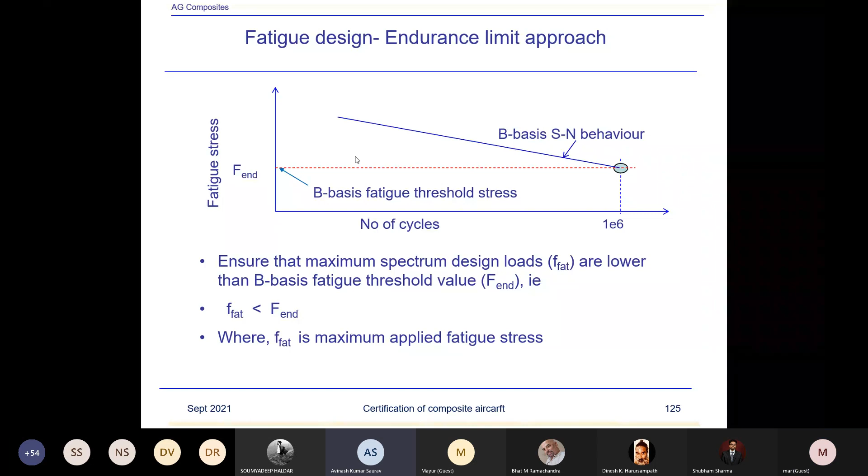If you see the slide around material evaluation, in your case it might be around slide 135 or so - material screening selection, all this building block approach. I'll be discussing how do you select the material and what tests you have to perform. So it is all covered. In fact, most of your questions are covered in my presentation because these are real issues. Any other question?

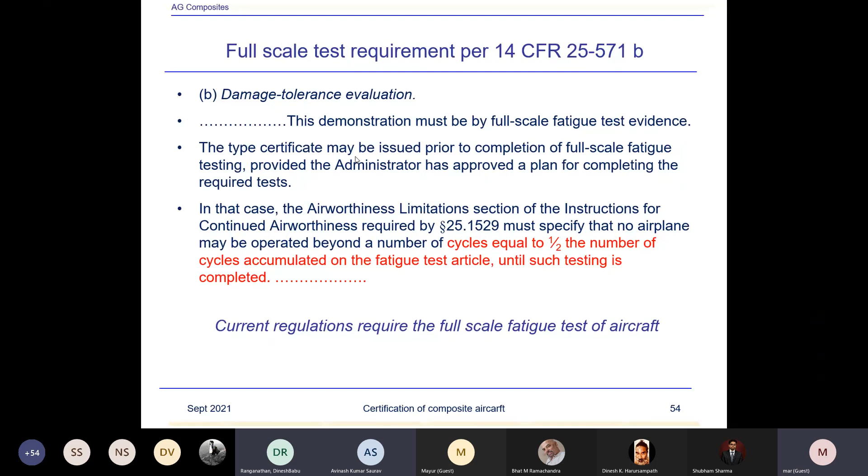Sir, a question in general. Myself, Dinesh. When we went through the curriculum, it was always told us that we will tailor the properties in the direction of the loading, and that's how we get a lot of benefit from composites. That was one of the other aspects of its superiority over metals. That's what was taught, yes.

But in general, whatever I have observed, this may be limited to my knowledge, but we end up doing components that are more like quasi-isotropic. So do you also see that, or is my knowledge limited?

No, basically, most regions of a structure, suppose the skin, are around quasi-isotropic: 25% 0, 25% 90, and 50% 45s. Usually we use 0, 45, minus 45, 90 directions rather than funky angles like 10, 20, 30, or 35 degrees. That is not used.

Conventional layups are used. Now coming back to quasi-isotropic - yes, most of the region is quasi-isotropic, but some regions could be 10% zeros or 80% 45s, where shear critical regions are there. So you will always tailor, but there's always a limitation. You can't keep changing the layups from one region to another. There has to be continuity of the fabric or tape layups.